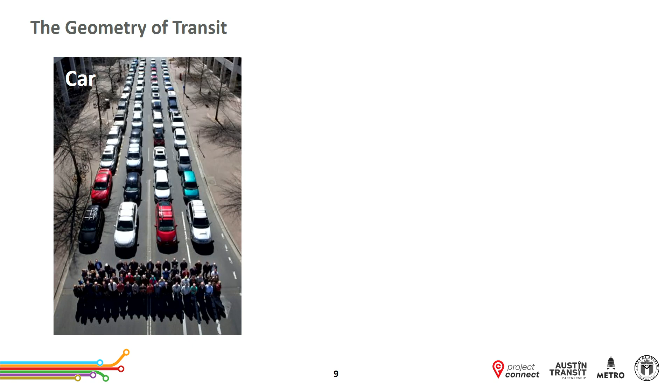Some of you probably have seen this sequence of slides as well. Single occupancy vehicles are amazingly inefficient uses of the real estate of our public realm. This is the amount of space it takes to move 100 people if they're traveling in their own vehicles, which is where the vast majority of Austinites travel. Bikes are a little more efficient - you can see how much less space the same number of people take up. But public transit is significantly more efficient than either of those. This is how we're going to be able to move our population around as we grow into the next 20 years and beyond.

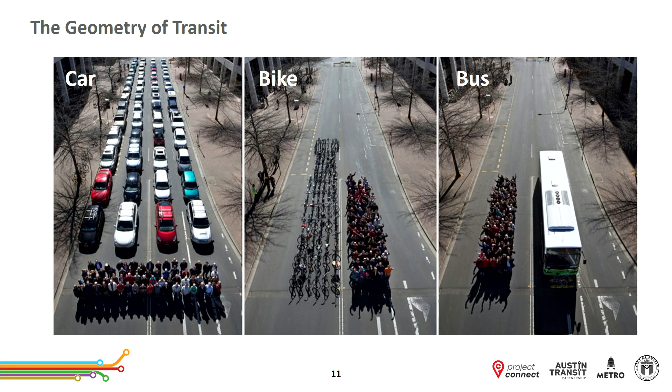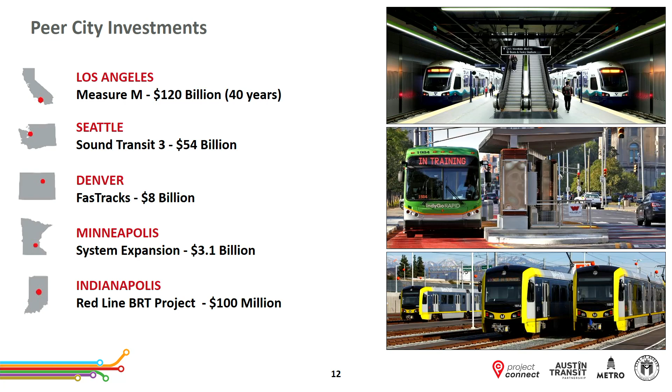We are not alone in this endeavor. We are one of many mid-sized cities, and some big cities like LA, some really big cities, who have made historic investments in transit recently. I think this is helpful to understand - we are in this company. This is the company that we are keeping now in terms of the kind of city that we are, in terms of our population, and frankly, the kind of city that we need to become. We are not a small town anymore. We are a global city, and so we need the infrastructure to basically behave like one.

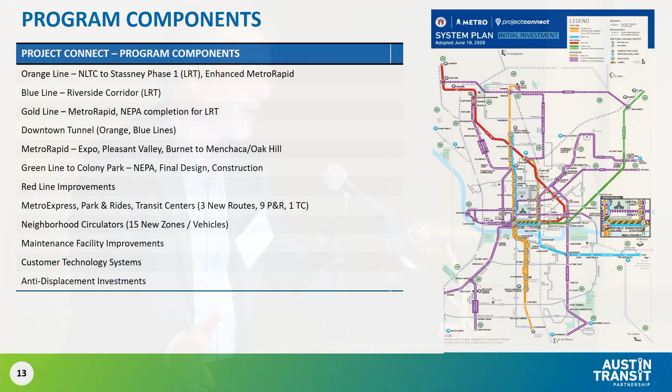So Project Connect, what is it? I'm going to talk a lot about the light rail lines because it's the biggest, most efficient, and most expensive part of the program.

Project Connect is a program of many, many projects, and they work together as a system. I think this is one of the things that convinced voters this was the right plan at the right time, and why we got 60% of the vote. It's important to recognize that all these elements, whether it's the new light rail lines, the new bus rapid transit lines, the new neighborhood circulators, the improved Red Line, or the future commuter line, the Green Line, all have to work together into a comprehensive transit system for our community, and that's how we're approaching it.

I also want to call out the consulting team that is really helping Austin Transit Partnership move this forward. HDR is our program manager of record, and the designers for the two light rail lines are AECOM and HNTB, on the Orange and Blue lines respectively. We've got some folks from AECOM here today, so thank you for all your great work.

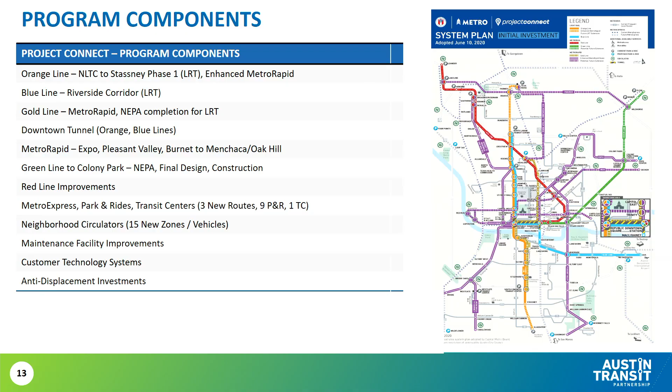One is, the only way we're going to do this is through partnership, and that's why the word partnership is in our name. So this is very much a partnership between the city, Cap Metro, and ATP, but also recognizing that in order to make this work, we need a vehicle to implement it as efficiently and effectively as we can. Part of the idea behind creating ATP as an independent, single mission-oriented organization was to do just that.

We have an independent board of directors. There are only two elected officials on it. No offense to the elected officials in the room, but the idea is that the other three members are community experts in fields relevant to this. So the idea is, how do we actually get this done as quickly and efficiently as possible?

So this is the sequence plan for the program, over the next 13 years. You can see some of the different aspects on the left: the two light rail lines, the commuter metro rail lines, the existing Red Line, and the future Green Line. The Green Line will come towards the end of the program, in part because that's when the ridership will be out there, in northeast Austin, Elgin, and Manor. But a lot of these elements of the program we're implementing simultaneously right now.

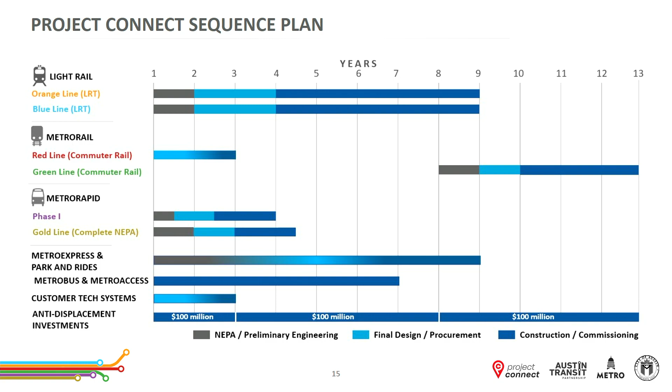If you look at the two top lines, the Orange and Blue lines, we're in that year one period where we're going through the environmental review process. Then we'll go into final design in 2023, which takes us to about 2025, and the idea is that we'll be operating in 2029. For some of us, 2029 might seem like a long way away, but it's really not that far — it's sort of a blink. So we're off to the races.

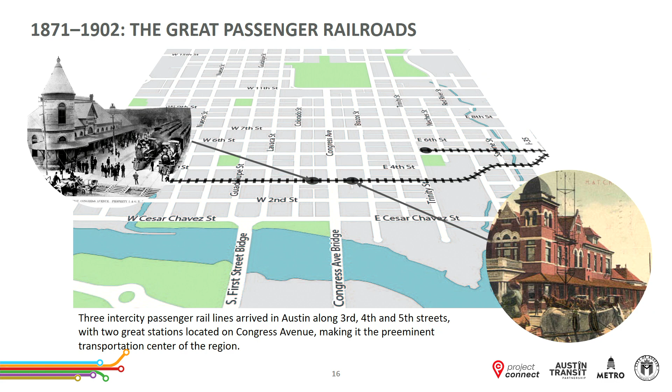I also think it's important to give this program a little bit of historical context. Rail in particular is new to our recent history, but it's not new to Austin. In the 19th century, we actually had three intercity rail lines that came to Austin, and there were two train stations in downtown Austin. So this is not something new — it has always been part of our history.

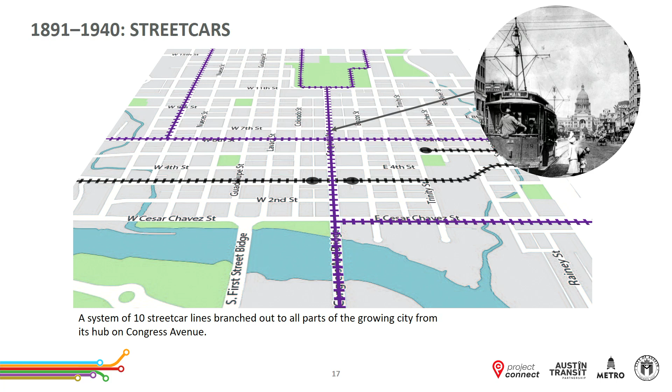And in the first half of the 20th century, we had a really robust streetcar system. Hyde Park was a streetcar suburb of early Austin development. So we just kind of lost our way in the second half of the 20th century in terms of transit, and a lot of cities had the same issues with the superhighway system, et cetera. But this is about bringing that back.

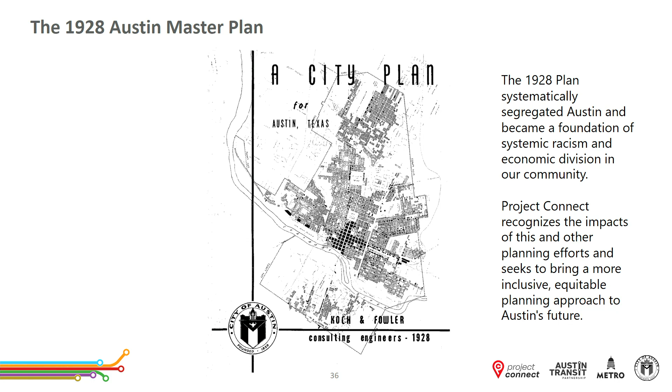I think it's also important to recognize some of the less savory aspects of our planning history. There have been many moments in our history, and in particular the 1928 plan, that systematically divided our city along racial and economic lines, and we're still feeling the impacts of some of those plans.

The 1928 plan basically segregated our city and moved all black and brown members of the community to East Austin, and then subsequently served them less well than folks in West Austin. I think right now we have to be mindful of that as we're making this investment. One of the components of the plan includes a $300 million anti-displacement fund, specifically intended to help mitigate any negative impacts of this infrastructure investment by reinforcing communities and supporting them as they are now, making sure communities of color are not displaced by these investments. So this is a lens through which we see everything we do—how are we ensuring this infrastructure serves the entire community and not just one community in particular?

We're also building on the foundation of recent planning efforts by the city through the Downtown Austin Plan and Imagine Austin, but also the Austin Strategic Mobility Plan. Light rail is a component of that, and the goal is to get alternative modes of transportation other than single occupancy vehicle to 50% of our population by 2040. It's an ambitious goal, and light rail is one component of it. Cycling and other alternative mobility modes are also part of that. But that builds in the kind of infrastructure and tools for us to actually make this happen.

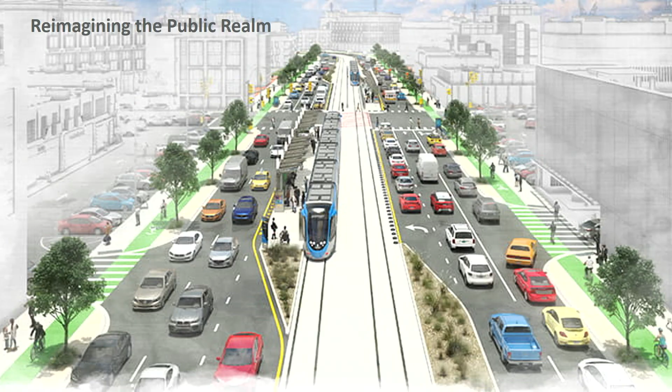And that brings me to some of the things that really aren't just about transit, which is that this is really about the public realm in general. Some of this is practical—we're going to be creating a lot of mess. Just to prepare everybody, it's going to be ugly, right? The disruption of our community through construction is going to be intense.

So just everybody saddle up and get ready. But one of the things we realize is that while we're doing that, if we're going to be that disruptive, let's put things back not the way that they were, but the way that they should be. So it's really about thinking about our public realm more holistically, and thinking about the program more holistically from a human-centered approach—how do we actually build bike lanes, street trees, and sidewalks, and create this carefully and holistically designed public realm around the transit.

And we're also looking at transit-oriented development. How do we create opportunities for development that's focused on transit and also set up in a way that serves our community equitably? So Cap Metro is actually in the middle of kicking off an ETOD planning process that will create a framework for development in our city that tries to build affordability into that framework.

So anyway, this to me is what's exciting. One of the things that's exciting about this is that it's about transforming the city—not just building transit, but also the public realm in general. And hopefully I can show how we're planning to do that. Part of it is about placemaking, identifying locations where we can create destinations around transit.

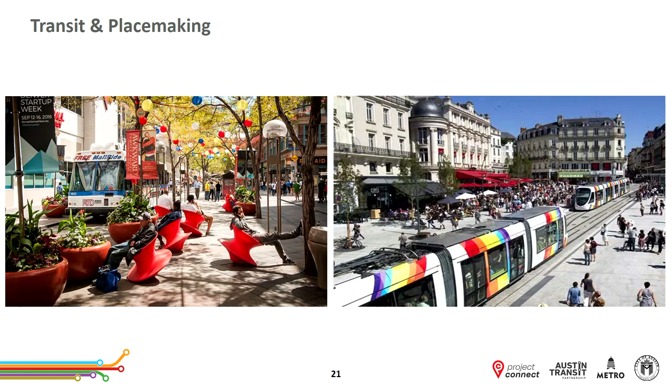The image on the right is really something that I have pinned up above my desk, which is to say, let's not put transit in a box. Let's make it integrated into this enhanced urban realm. I'm hopeful that we can actually take part of the drag, for example, and make that car free—and light rail only—and create these kind of more pedestrian focused places.

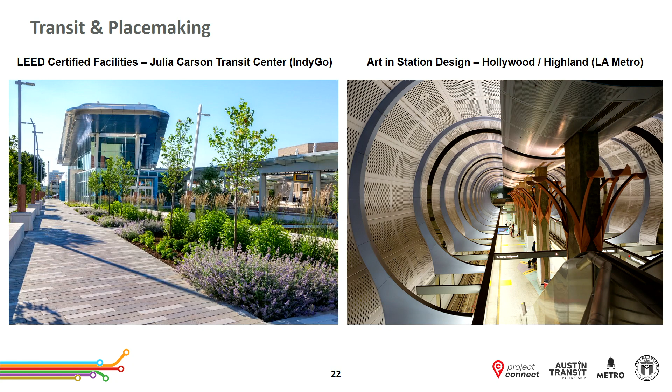They're also incorporating landscape into our approach. Our city is defined by its natural resources and our protection of the environment. So how do we build a landscape approach into the development of this transit system? They are not mutually exclusive. And also building in opportunities for public art—these are the things that define Austin, make this a place that's different from Houston and Dallas. No offense, Houston and Dallas folks. So how do we actually enhance the things that make Austin, Austin?

And then how do we build innovation into our program? We have the benefit in Austin of not having a lot of legacy infrastructure. So we suffer the lack of having any legacy infrastructure, but the benefit is that we don't have to deal with all this stuff left over that we have to maintain or try to retrofit.

So when we go in and design our light rail lines, we can be at the cutting edge of light rail technology. One of the things we're looking at, for example, is going catenary free - meaning catenary is the electrical power lines up above. How do we actually use battery technology and other charging methods to not have a catenary system at all? And with our bus program, going to 100% electric buses.

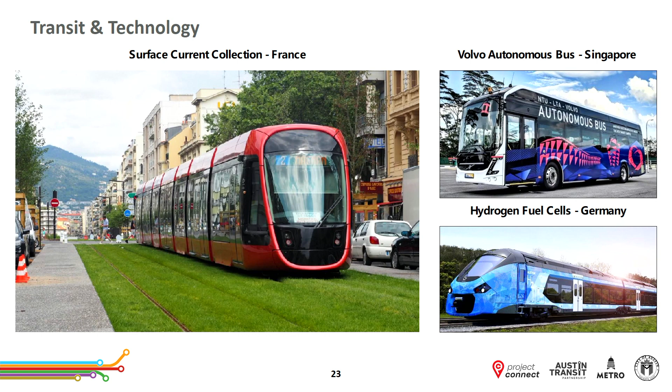So how do we do this? Develop the system with cutting edge technology that meets our environmental aspirations. And green tracks - are there places where we could actually plant the track bed, which is great for stormwater management, reducing heat island effect, as well as creating a more holistic environment for our citizens.

We just released the 15% design documents in the summer, in August, and we're moving towards 30% design. Those will be released next spring. So we're still early days, but the goal is that by the end of next year, we have the basic building blocks of the system locked in, and we can continue to move forward.

The FTA is a huge important partner of ours. They're going to pick up half of the cost of the program for the light rail lines, and so they're an important partner - they're with us every step of the way. Okay, so just some overview.

Alright, so let me get a show of hands. How many people know a lot about Project Connect? Okay, good. Alright, how many people know nothing about Project Connect? Okay, great, that's very honest of you. No shame in that.

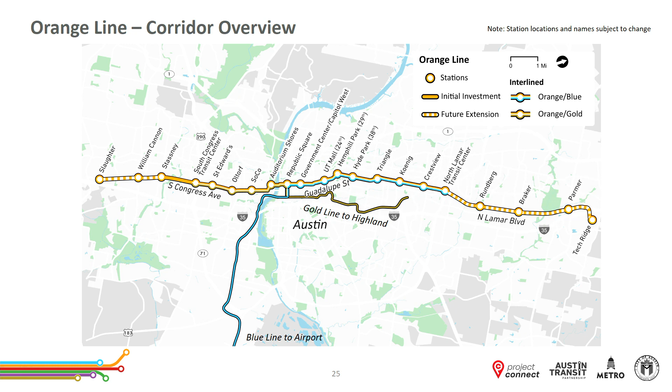Right, so this is, again, going back to that idea - this is a system. All these elements have to work together. A couple notes about stations - where we locate them, how we choose where to locate them, how far apart they are.

Basically three broad criteria we use. One is how do they connect to other aspects of the transit network, particularly bus lines and other last mile connectivity. The second is you're constantly trying to balance speed - if you have fewer stations or they're farther apart, the overall system moves quicker - and convenience, since obviously the more stations you have, the closer you are to a station at any given time. So we're always trying to balance speed and convenience.

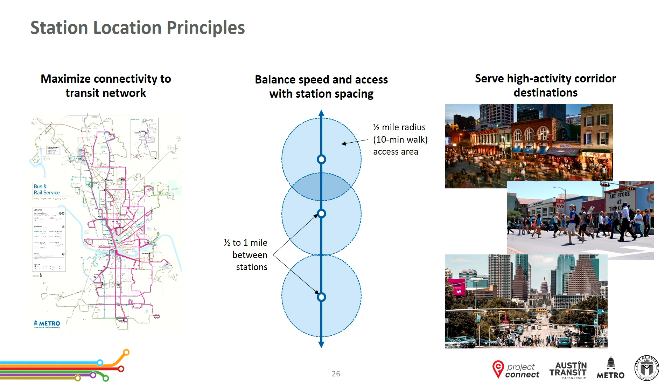Having that half mile to one mile distance between stations, you can see we try to have a little bit of overlap between those half mile circles, but not a lot. Third, we're looking to serve the public where they are, focusing on areas of high intense use or destinations with lots of people. We're a big event city, so serving event traffic is important, and we're building a new Red Line station at Q2 Stadium. Organizing the system around those hotspot nodes is important.

Another couple notes about stations: they want to be flat and they want to be straight. We have a lot of topography in Austin; we're not a flat city, it's a hilly city. So managing the topography and figuring out where to put stations is trickier than you might expect, particularly in places like South Congress, which is basically a big hill. So we've got to put a flat station somewhere in there, and finding a flat place to do it is not that easy.

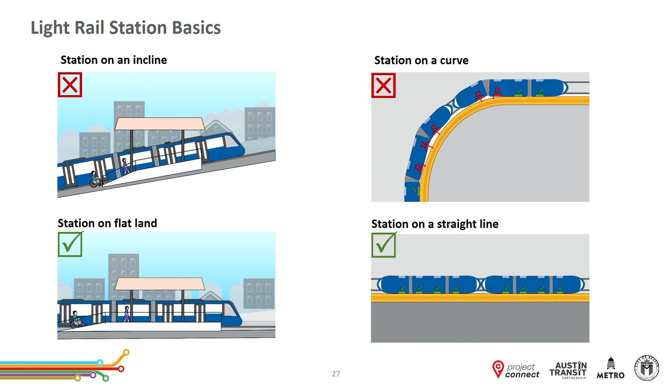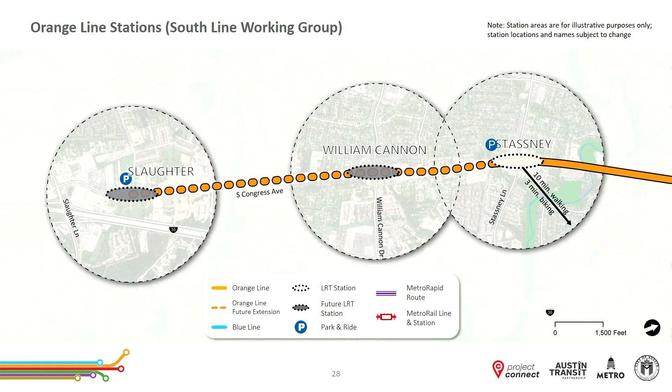Just to walk you through from south to north, this is the Orange Line. These circles represent essentially a 10-minute walk shed around the station, so you can see how those communities will be served. We have a station at Slaughter Lane and another at William Cannon, and in the initial investment, the southern terminus of the system will be at Stassney. We also have park and rides at some stations on the perimeter, so people traveling from farther out, beyond that 10-minute walk shed, can drive to the station at the perimeter and get on a line into the core.

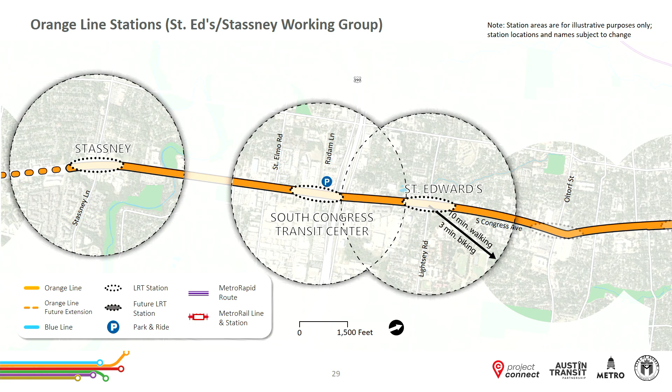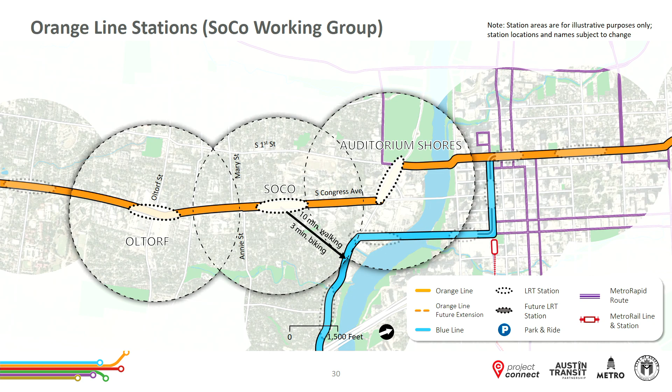Moving north, we have another station at the existing South Congress Transit Center, just south of 290, another at St. Edwards, and moving north, one at Oltorf, South Congress, and then Auditorium Shores. When we get to Auditorium Shores, the Orange Line, which is generally traveling at grade on the surface in the middle of the street, will go into a tunnel and travel under the lake, continuing in a tunnel all the way up to MLK. So downtown, both the Orange and Blue Lines will essentially be a subway system.

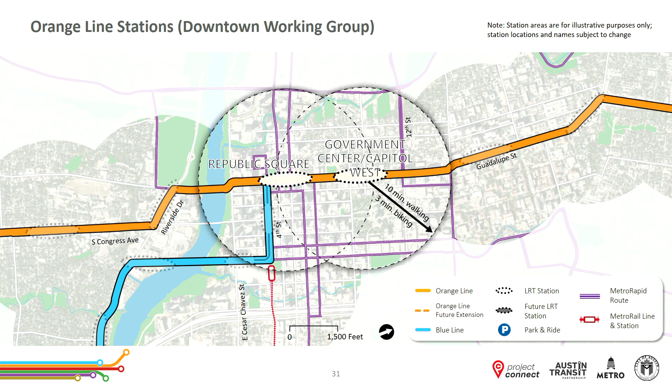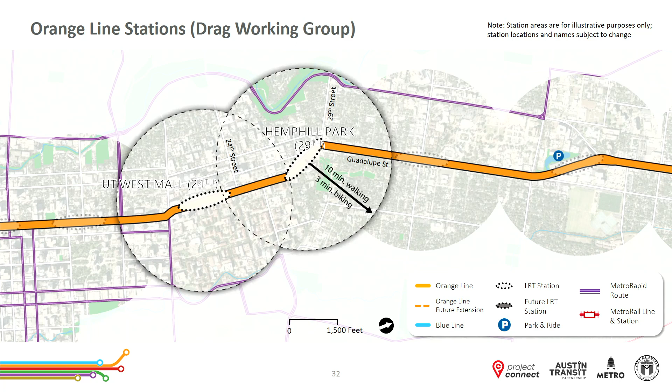Moving north, in downtown we have an Orange Line station at Republic Square, another centered around 12th and 15th Street serving the Capitol complex. Moving further north, a stop at the Drag at UT, one at the north end of the Drag between 27th and 29th Streets, another at 38th Street serving the Hyde Park neighborhood, one at the Triangle serving Allendale, and then moving north, Koenig, Crestview, and the North Lamar Transit Center.

You can see the logic emerging about where stations are located. Crestview, for example, is a hugely important station because there's a Red Line station at that intersection, and it's an area with real potential to grow. I think it's an important transit-oriented development location where we're already seeing, like at the Domain and elsewhere, nodes of density built around transit. That's part of how we're going to grow as a city going forward.

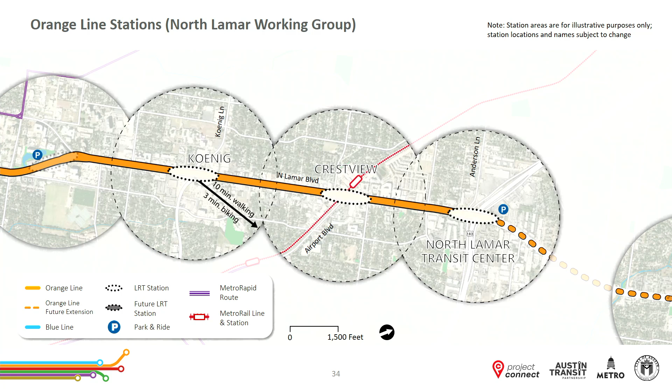So imagine you're a commuter living northwest in Cedar Park. You could get on a Red Line train, take it down to Crestview, transfer to the Orange Line or Blue Line, and take that downtown—a really convenient, easy transfer. Going north, in the future investment, we have stops at Rundberg, Braker, Parmer, and Tech Ridge.

The other second light rail line is the Blue Line. It runs from the airport along East Riverside, that corridor, all the way down to the South Central waterfront, where it crosses over the lake on a bridge, then goes into the subway tunnel on the north side of the lake, joins up with the Orange Line at Republic Square, and continues north with the Orange Line.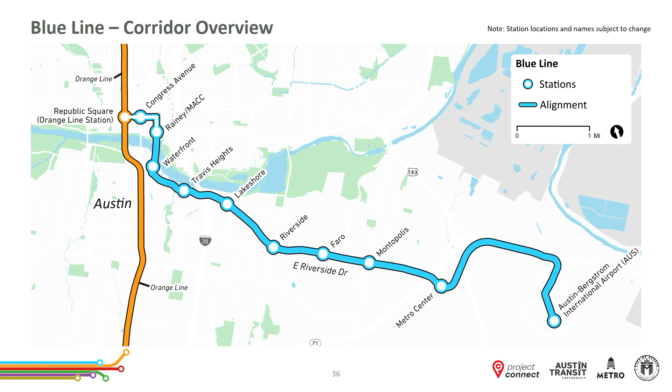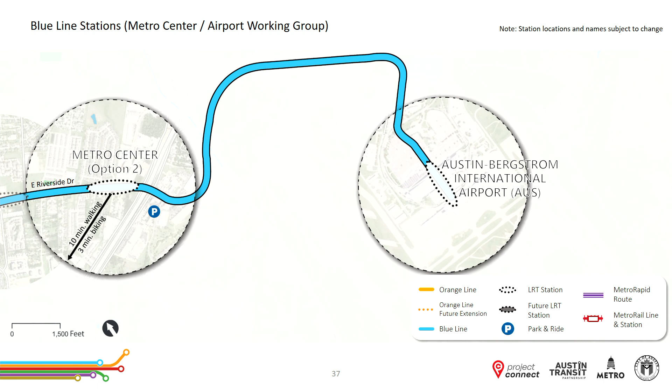So again, Austin Airport, imagine how great this is. You get off the plane, walk out of the terminal directly onto a train, and take it straight to the convention center or your hotel downtown. Most cities would die for that kind of connectivity, and we're going to have it from day one of having our system built. This is an image of what that station at the airport would look like, coming in right between those two existing parking garages. So really quick walk to the terminal. And when the terminal expands, it's going to be expanding towards those garages, so it'll actually come closer to the station than it is even today.

Again, moving down Riverside, there'll be a stop at Montopolis, one at Faro, and one at Pleasant Valley, the Riverside station at Pleasant Valley. Pleasant Valley is a hugely important corridor. There's a Metro Rapid line that we're going to be putting on Pleasant Valley, similar to the 801, 803 buses that we have now. That's also the site of River Park, a new 95-acre development being built by Presidium and their partners.

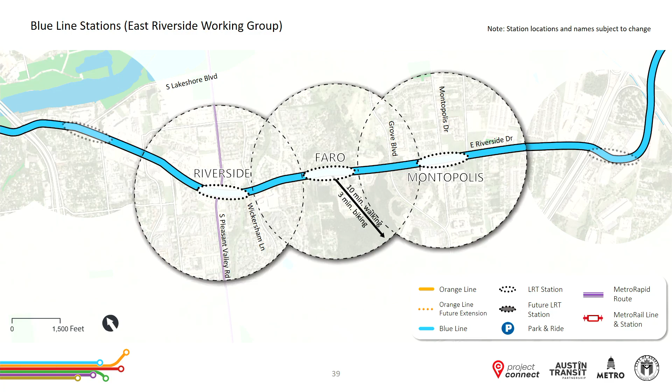So this is the place I think we're going to see a lot of new residents. How many people have driven down East Riverside recently? Highly recommend it, because you can already see the development coming and happening. There are multifamily buildings cropping up very close to Riverside, and you can imagine 8 or 9 years from now, when the Blue Line is up and running, East Riverside could be continuous multifamily housing from basically 71 all the way to 35. I know for some people that's scary, but I think it's going to really contribute to our vitality as a community by having people close together and close to transit with easy access.

We have a stop at Lakeshore, near all that new development happening by the Oracle headquarters. One in Travis Heights, serving one of our historic communities. A station at Waterfront, directly adjacent to the new South Central Waterfront development at the Statesman property—that's right here. And then we come over the lake on a bridge.

Whereas the Orange Line goes under the lake in a tunnel, the Blue Line will go over the lake on a bridge. Then when it gets to the north side of the lake, it goes into the bank of the lake, into the tunnel, and then travels up to basically the convention center, turns left, and connects with the Orange Line. So that's essentially the layout or alignment of the Orange and Blue Lines, to give you the big picture.

And I want to talk a little bit about what's happening downtown with the subway, because it's pretty fun to talk about, but also there are some really exciting placemaking opportunities that we're creating and exploring.

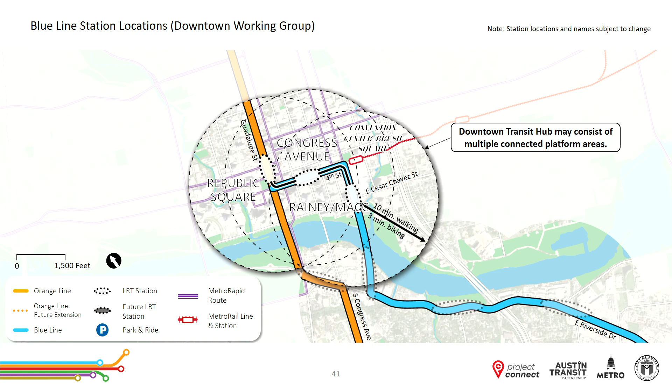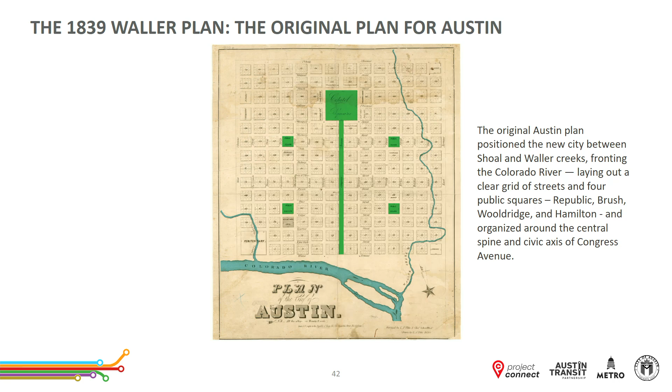Part of our goal in thinking about the downtown section of the alignment and the subway is how do we actually reinforce and strengthen that basic underlying structure of our city plan. It really centers around 4th Street itself—4th Street is the hub where everything comes together. All the lines come together there, and it's also really where our greatest public space opportunity is, connecting those historic squares, Republic and Brush Square. You can see Brush Square is right adjacent to the convention center, and Republic Square, recently renovated by the Austin Parks Foundation and the Downtown Austin Alliance, has become one of our great public spaces.

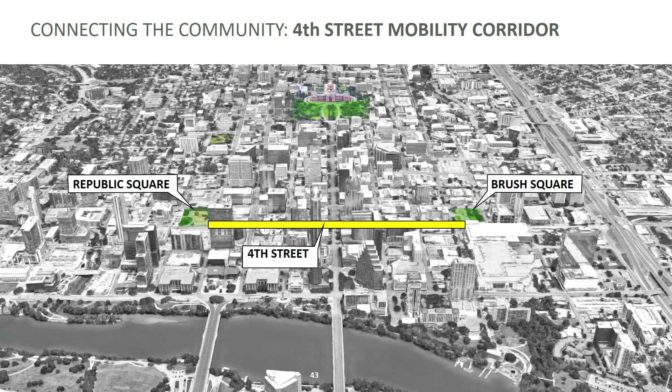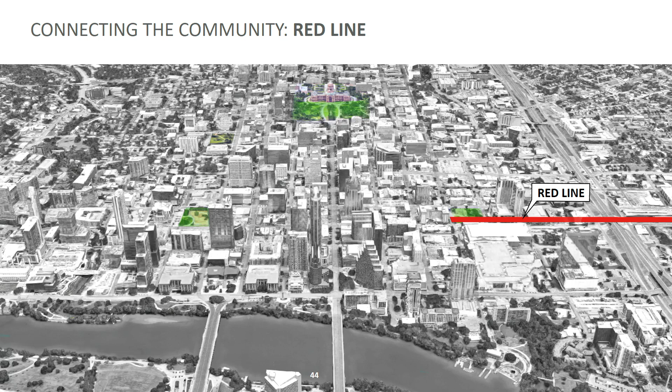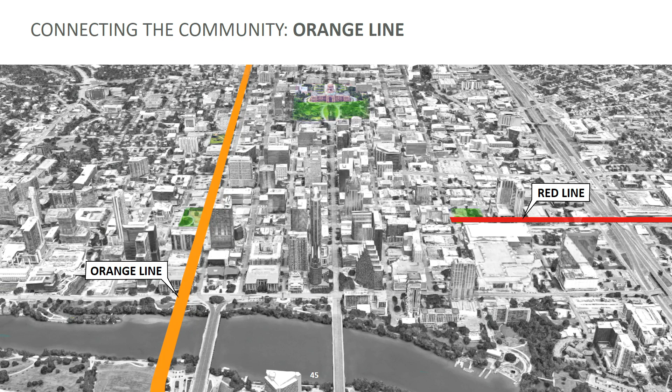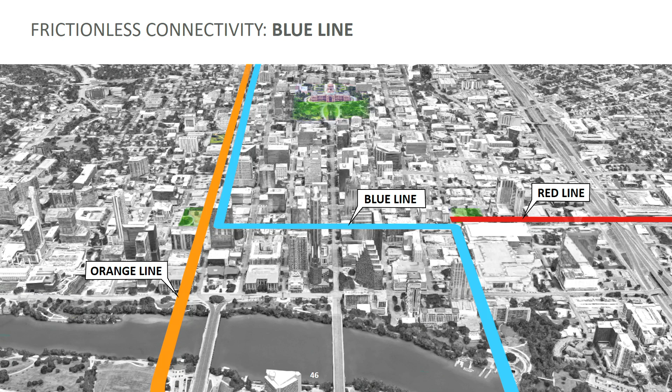So just to show you how all the lines come together, you've got the existing red line that currently comes into the downtown station at basically Brush Square. The orange line is coming up on the west, essentially underground under the lake, but basically underneath Guadalupe in terms of its alignment. The blue line comes over on a bridge on the east side of downtown, goes underground under Trinity Street, goes up to 4th Street, takes a left turn on 4th Street, connects with the orange line at Republic Square, heads north, underground along Guadalupe.

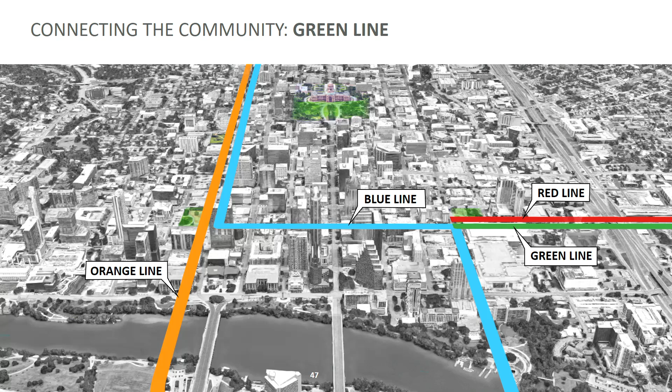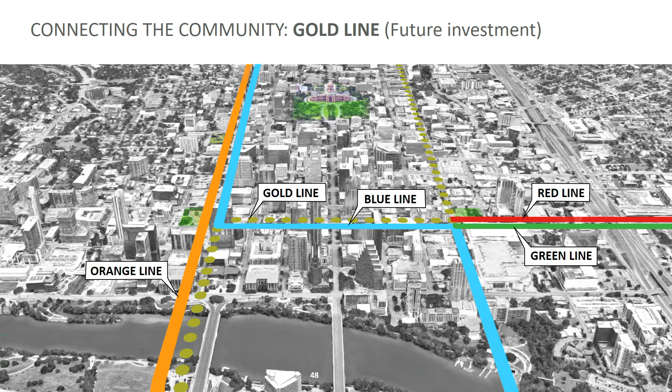The future green line will share the alignment with the red line where it comes downtown. Obviously, when it gets out east, it goes farther east while the red line heads north. The future Gold Line is intended initially as a bus Metro Rapid line, but in future could become a light rail line going up Trinity to the north up to Highland Mall.

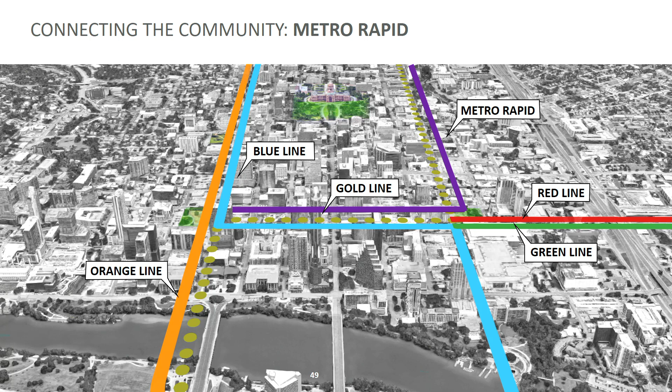And then Metro Rapid, essentially the Expo line, will run from the Expo Center down San Jacinto or up Trinity and then across 4th Street. So all of 4th Street is where all these lines come together. Remember the importance of the system.

And so at that 4th Street location, we're creating what we're calling the Downtown Transit Hub, which is a multi-level system, including a continuous mid-level concourse that ties all of these lines together to create really easy transfer and connections between all aspects of the system.

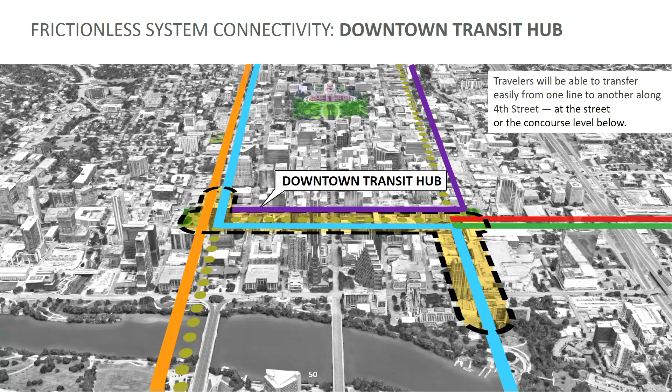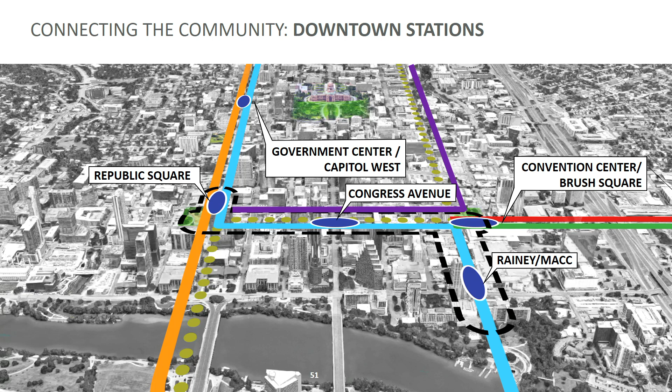And then you can see how the stations are located along that transit hub. We've got basically four underground stations: Rainey MACC, this new convention center, Brush Square station, which really is a connection between the above-grade station for the Red Line and the downtown transit hub, a new station at Congress Avenue, a new station at Republic Square, and then another underground station. It's not connected as part of the hub, but a few blocks to the north up at Government Center near 15th Street.

So here's another plan view of that hub. The hub is basically described in yellow. That's the continuous underground concourse connecting all these different stations. Those salmon colored boxes represent the above-ground entrances, main entrances into the hub, so you can see how they're spaced out along that length. And importantly, you've got 4th Street as being this corridor that has three along its length and two at either end. We'll talk about that in a second.

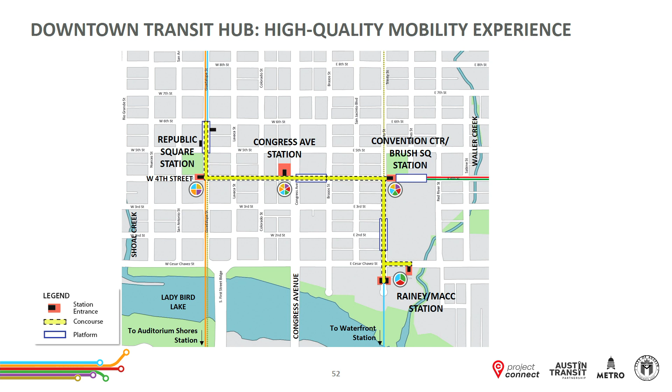One of the ideas behind the hub is how do we actually make this transit system as easy to use and easy to navigate for people of all abilities. For able-bodied people, this is not a problem. But if you're either in a wheelchair or you've got three kids or you're carrying luggage from the airport, having this underground concourse where you can actually move between the lines with real ease and speed is going to be a real big asset to us. And that's who we're designing this for. It's not for the able-bodied person, it's for everybody.

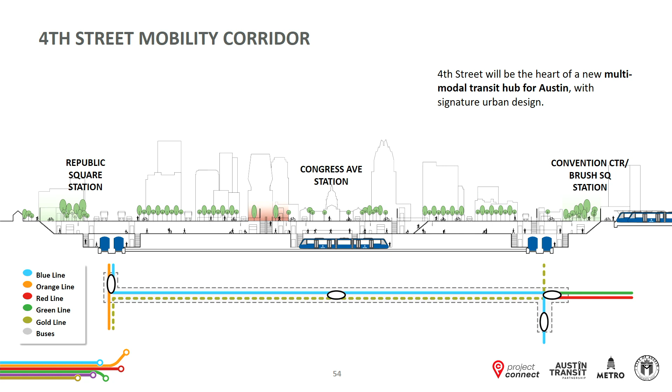This is a blow up of that. It shows how they're all connected and some of the elements of it. And I'll talk about how we make this inviting and easy to navigate, and also obviously connect all these levels through elevators, so it's 100% accessible.

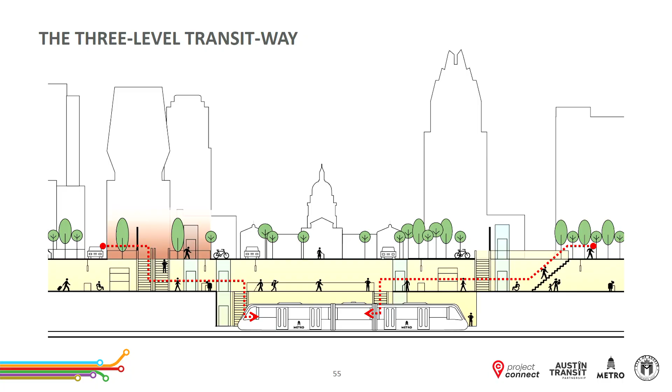A few things that we're trying to build into our station design: one is really large, generous escalators and stairs. We are going to be a bigger city, and we've got to build facilities to accommodate lots of people. Having long sight lines, this is a multi-level system, a lot of it underground, with long sight lines with views to different levels so that people can get oriented and really know where they are at all times. And then access to natural light, being aware of where you are relative to the street, and bringing daylight into the system. These are some of the principles we're using as we start to imagine the design of these stations.

One of the benefits of having this multi-level system is that at the platform level, we can create double height spaces, really generous spaces that are ennobling.

So when people are going underground, they don't feel like they're in an unsafe rabbit warren. They can see where they're going, they can see other people, and it's really generous and inviting.

So platform screen doors, so it feels a little bit more like the airport, right? Where the train is not there, you're basically protected, people can't get into the tracks. When the train comes, it stops at the right place every time, the doors open in the right place every time, you know where to stand. There's clear signage, there's clear wayfinding. It's all very comfortable and easy to navigate.

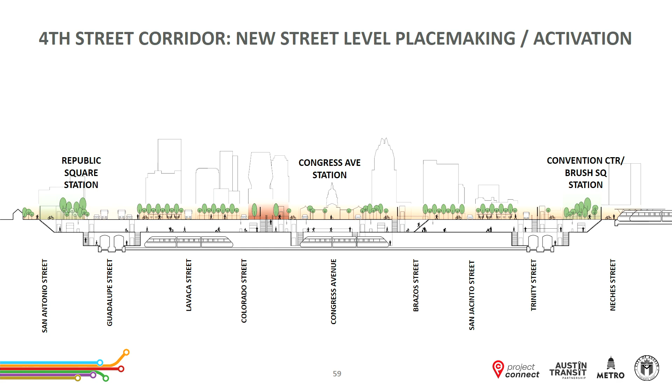The other great thing about the concourse is that it allows us to basically design this from the street down, right? I like to say, the heart wants what the heart wants, the train wants what the train wants, right? You don't tell the train what it wants, it can only go in certain ways. So the train down here is going to want to go where it wants to go. It has certain turning radii, it has certain vertical curves it can manage. But because we have this concourse layer in between, the street can want what the street wants. And we can really design 4th Street to be what 4th Street wants to be, or what it can be.

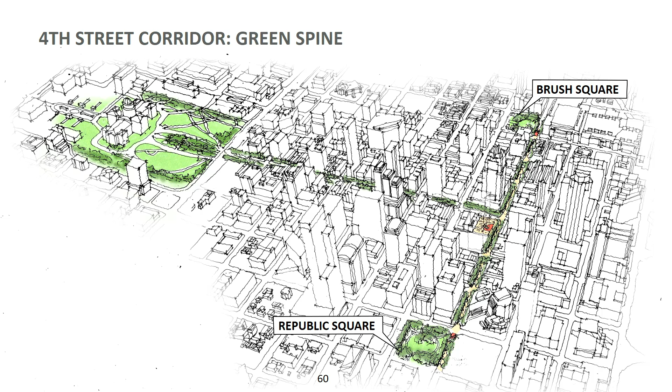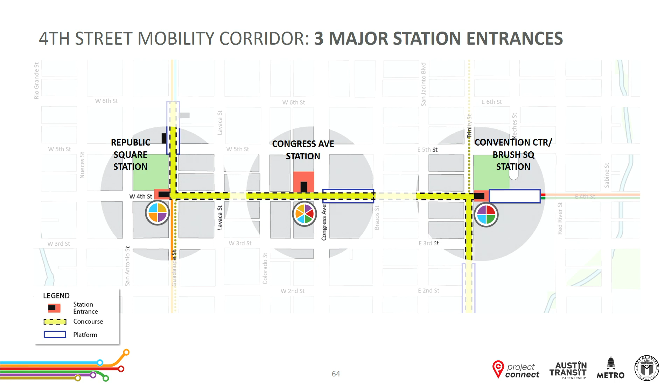So you've got 3 stations along 4th Street. The 2 at the end really become bookends for the corridor, and so we've got these plaza areas at either end. This is on the east side, the space between Brush Square and the Convention Center, where it's closed off to traffic already, where we can have a really generous entrance down into the subway system.

And then on the west side, at Republic Square, I think this is an area where there's not a lot of traffic on the street. It gets closed down all the time for farmers markets. Let's see if we can neck down the traffic lanes even more, get some real estate where we can have a really generous entrance. So at both ends of this corridor, you have this kind of signature entrance structure.

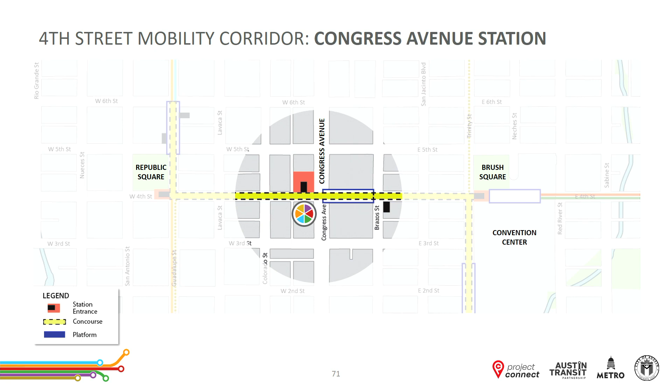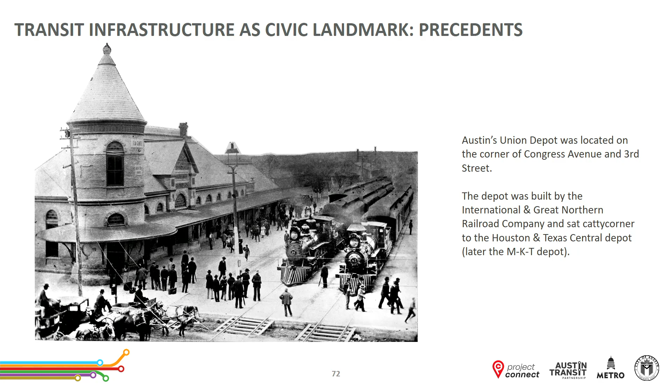And then in the middle at Congress Avenue, this is really the hub of the hub, right? And going back to history, we used to have a train station downtown, a real train station, like most cities. So let's see if we could bring that back. And it turns out we have a parking lot at the center of literally the best real estate in our entire city - it's had a parking lot on it for 50 years. So we can do something better. And looking at other cities, these transit buildings become kind of important civic elements in the urban realm.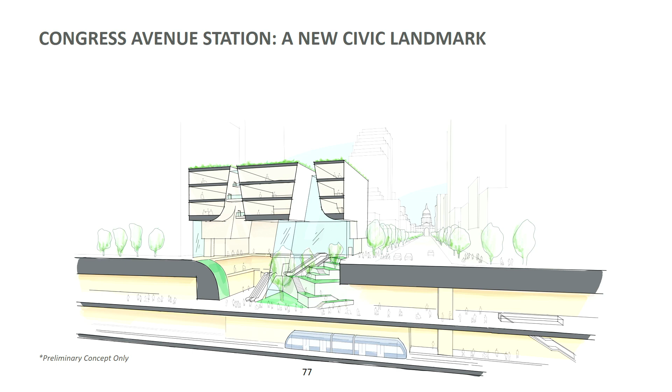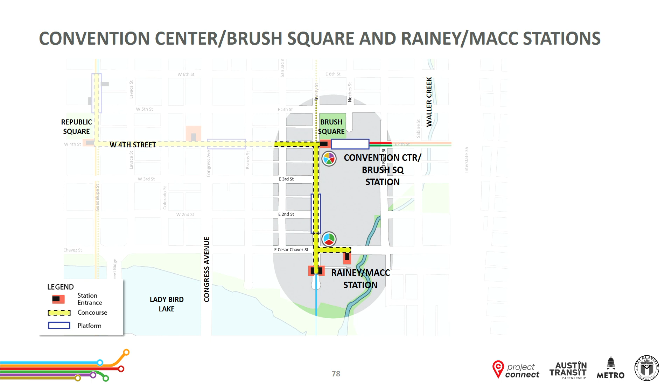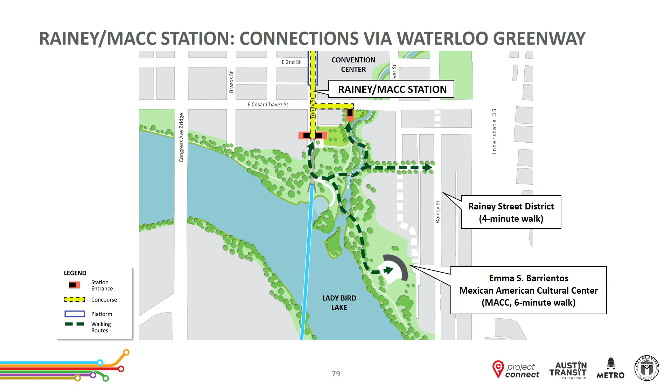On the east side of downtown, it gets a little different. You can see the concourse continues and the transit hub continues down Trinity Street, down to Cesar Chavez. At Cesar Chavez we have an entrance, the Rainey/MACC station, basically at the corner of Cesar Chavez and Trinity. But we're looking at two potential entrances south of Cesar Chavez, connecting people to Rainey Street to the east and to the lake to the south. We also have the benefit of putting a lot of money and investment into our green spaces in this location, like the Hike and Bike Trail and what the Trail Foundation is doing there, Waterloo Greenway directly to the east. So you can imagine coming from the airport, coming to the Rainey/MACC station, coming out of the subway into a garden. What could be a more Austin experience than that?

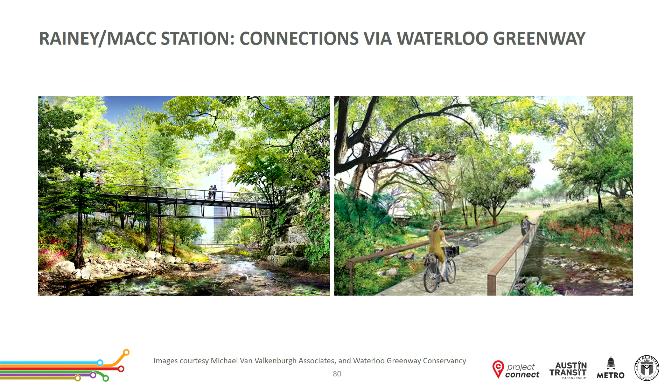Right on the lake, this is also where the bridge coming over the lake connects. The bridge will have a pedestrian and cycling component as well as trains, so that pedestrians and cyclists can come across the bridge and connect to the Hike and Bike Trail or the Waterloo Greenway Trail and head north to see a show at the new Moody Amphitheater. How many people have been to Moody Amphitheater? I got to make a plug for it, it's pretty great. If you haven't gone, I highly encourage it.

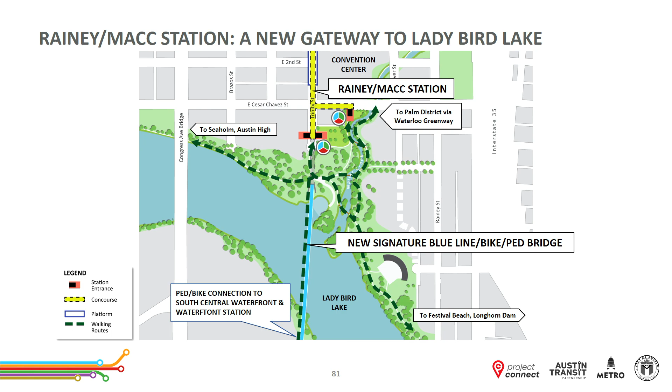Get involved, we really need you. This is obviously the biggest thing we've ever done in Austin. We need as many people to get involved and make this thing a reality as possible. It's going to make it better. This is not just about building it, it's about building it to be fantastic. We're trying to bring that aspirational aspect to this, and your participation is critical to that.

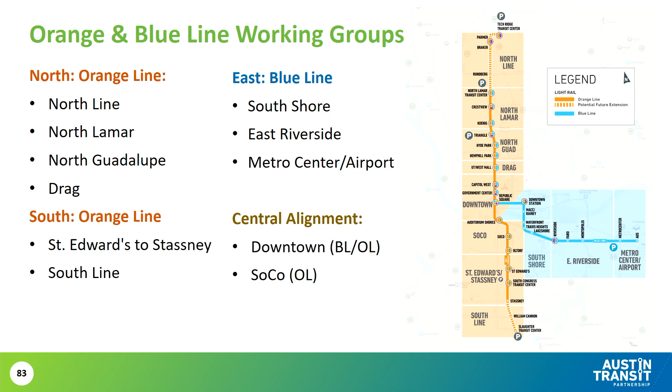We have created a whole series of neighborhood working groups to break the alignment down into smaller groups. So if you live in one of these areas, this is a great way to get involved in your specific neighborhood and the things that are important to you and your neighborhood there. Please, I really encourage you all to get on this journey with us. Really appreciate your time today, and look forward to everything to come. So thanks very much, appreciate it.